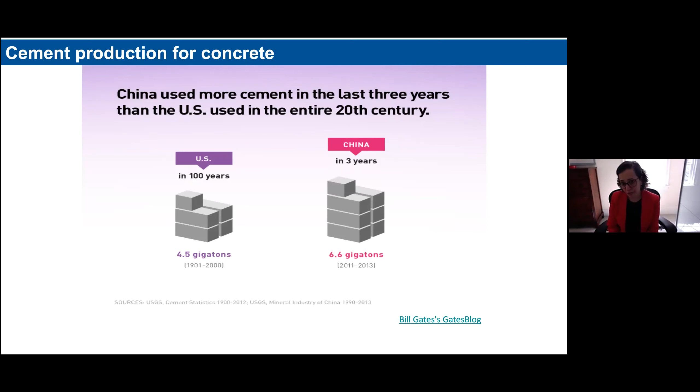And the reason why this happens is that to produce cement, to make these calcium silicates that are the powder that we mix with rocks and sand and water, you need to burn at very high temperature calcium carbonates and other minerals. This is a process that in principle is very convenient. It was invented in the beginning of the Industrial Revolution. It is very convenient because you can produce this calcium silicate everywhere on Earth using minerals that are available everywhere and in big quantities. But then you need to burn them at very high temperature in these huge kilns.

And this process, in which you extract the calcium from the calcium carbonates, leads to this huge release of CO2, huge due to the volume of the cement that we use. So the question is really, can we reduce, can we do the same thing? Can we meet the needs of the infrastructure, of the update of the current infrastructure, of the new infrastructure that we need to build?

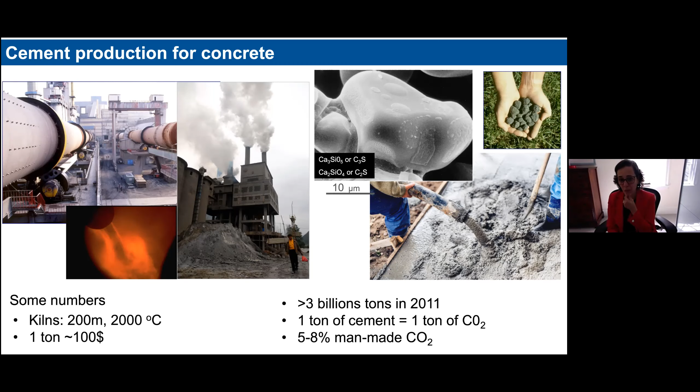Can we do this in a smarter way, reducing actually the amount of cement that we use, maybe changing the production of cement in a way that is more sustainable and greener? And so in order to understand how to do this, we need inevitably to understand how this material works.

And whereas there is more than a century of use of this material and more than a century of investigation of these materials, there are still gaps in understanding the fundamental physics that control its functioning. And this is where actually things can be done to devise more sustainable practices and more sustainable formulations.

So the reason why we actually produce this powder is that it's very reactive with water. When you mix it with water, the grains of the calcium silicates immediately start to dissolve. And from the dissolution of the grains, there is another material that actually forms and precipitates. And this is what is called calcium silicate hydrate, or CSH, which precipitates in the form of nanoparticles. And these nanoparticles now are very sticky.

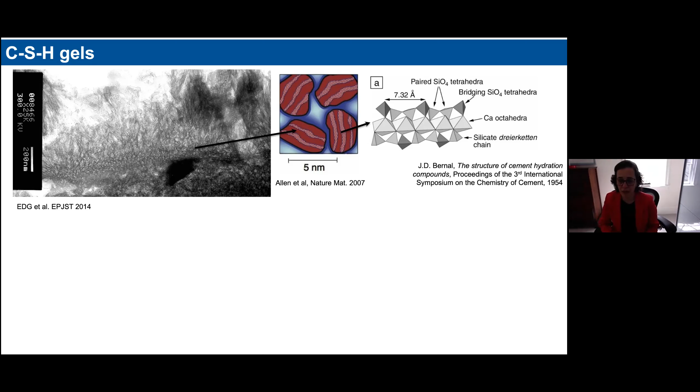They stick together into a gel-like structure that fills the space and literally glues together cement and all the different components of concrete into a solid that is basically as hard as a rock and that we can use for buildings, bridges, and all our infrastructure.

So the questions that are put forward at this point are, how can we reduce the CO2 footprint of this process and of this material without compromising the mechanical performances? Ideally, we would like to enhance the mechanical performances so that we can do more with less. And this could be one of the strategies that we need to pursue.

The other option is actually to try to change the chemical composition of this material and try to come up with a composition that doesn't require such a process that releases this big amount of CO2. So why is this not easy?

Well, at the very small scale, this material, as I said, precipitates as nanoparticles. These nanoparticles have a layered structure that, in fact, is very similar to the structure of a rare mineral called tobermorite, as was recognized already by Bernal several years ago. The nanoparticles then form amorphous structures, which then aggregate into this type of gel that has a fine and very wide pore distribution.

So this is the tricky part, because this is a solid that forms in very non-equilibrium conditions and whose mechanical properties at different length scales are very hard to predict. So it's very hard to understand how to change the chemistry in ways that modify the aggregation process, which then modifies the properties of the final product.

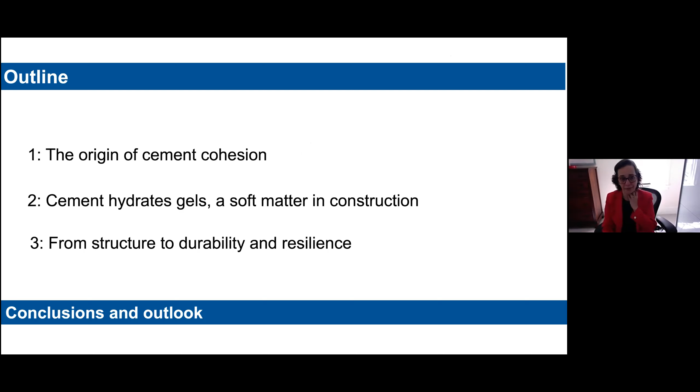Okay. Feel free to interrupt me at any time and ask questions.

So why is this material sticky to start with? Well, you have these nanoparticles that precipitate. And in fact, even at the very small scale, cement is a particularly complicated material. The nanoscale structure is really similar to a rare mineral called tobermorite, although with tobermorite you cannot actually make cement. And this has been studied. There is now a large literature on atomistic simulation of this material.

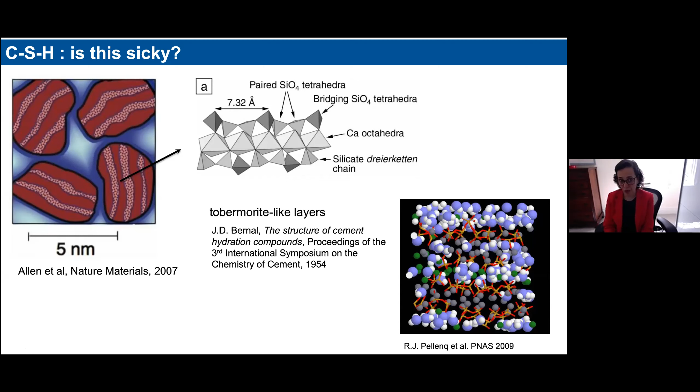But in the end, the cohesiveness of the material comes from the fact that the surfaces of the nanoparticles are very sticky with each other, and they are immersed in water and the ions that are continuously produced by the dissolution of the grains.

So, if we look at what happens between two nanoparticles, you have the surfaces of the nanoparticles that are negatively charged, and the surface charge evolves as cement hydration proceeds due to the underlying chemistry. So you have these negatively charged surfaces with counterions in between, which are mainly calcium ions, and so you have basically like-charge attraction.

But in fact, it's not uncommon in colloidal systems. Some of this, for example, can be understood, as we know, with the DLVO theory. But in this case, this picture really does not apply, because the surfaces have quite high negative surface charge. And the counterions in between are mainly calcium ions, which are divalent.

In fact, if you use the DLVO theory to compute the net interaction in this type of system, you basically get only repulsion. So what this means is that the cohesive interactions must come from whatever DLVO does not include. And so they must be the result of strong ion correlation forces that are present in the system due to the high surface charge and the fact that you have divalent or multivalent ions.

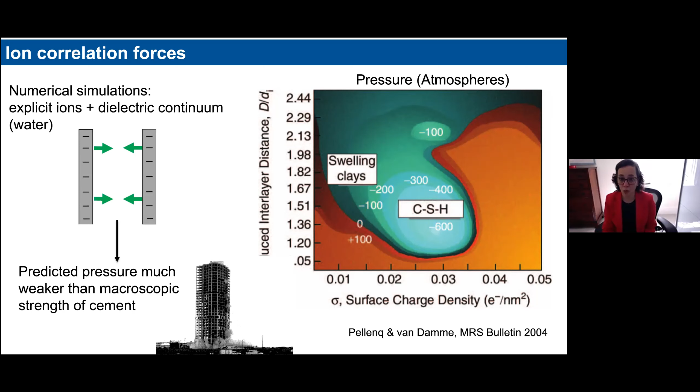So what we have done is to consider the two charged surfaces with the calcium ions confined between them, but with the fact that the medium in which they are immersed is not a bulk dielectric medium, but actually water. So we have performed simulations. This is mainly the work of my student, Abhay. I insist in saying my student, but he is now a postdoc at NIST.

So during his thesis, he devised this model in which we also consider explicit water. We used SPC/E water, and we did some tests also with TIP4P water to make sure that our results were not affected by the choice of the model.

And so when you do three-dimensional simulation of these charged surfaces with the ions in between and with explicit water, you realize that the situation is quite different, because in fact the ion and water structuring in confinement changes completely the net forces between the two surfaces.

Basically, what happens is that there are ion-water structures that become specifically stable at different degrees of confinement, and these ion-water structures do two things. They optimize the packing of the confined system in between the two charged surfaces. They dramatically decrease the dielectric screening of water in this very small space, because all the water that is there is bound in this ion-water structure. And this makes the cohesive interaction between the two surfaces grow by 2 orders of magnitude.

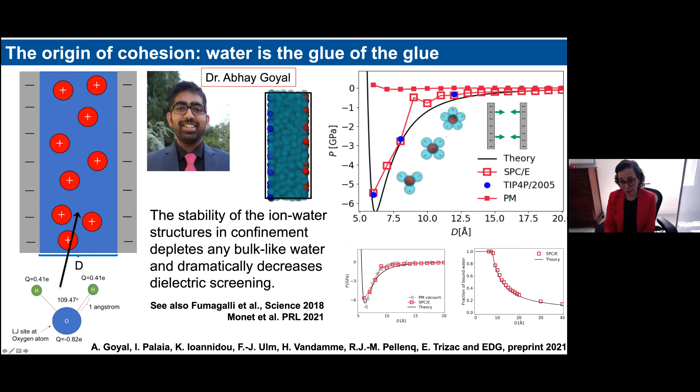We can also use the theory to predict the fraction of bound water that is present in the system at different degrees of confinement, and then compare it with the data in the simulation, and they actually agree quite well.

So how does it work? Well, basically what you see is that in presence of high surface charge, the ions are squeezed close to the surfaces, and they form these hemispherical hydration shells with the water, and the stability of this structure changes with the degree of confinement. As you increase the confinement, the stability of this structure becomes higher and higher.

And so as you decrease the space available, what you get rid of is water that is bulk-like because it's free. And all the water that remains is the water that is very persistently bound to the ions. And so as you increase the degree of confinement more, you select a different type of structure depending on how much water is available and which structure you can actually pack in the more and more confined space.

So this phenomenon actually has two consequences that are very important for cement, because they explain two very strong observations that have been made in experiments over the years. One is the fact that the forces between the surfaces, the cohesive forces of cement, are actually very ion specific, which makes, in fact, changing the chemistry and coming up with greener formulations very tricky and difficult to do. But this understanding can now open new ways to see how to do this.

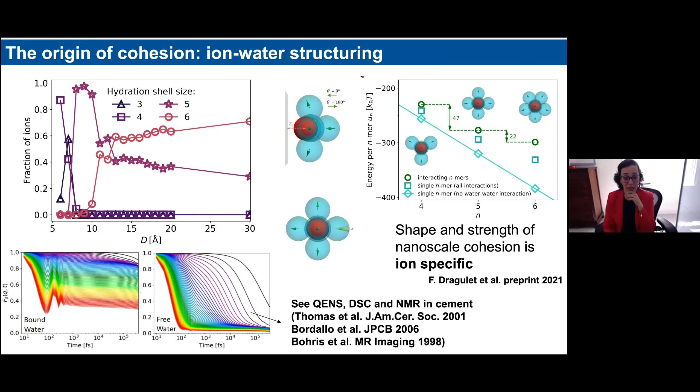This phenomenon, the structuring of the ions, the stability of different types of ion-water structures, and the water dynamics depends on the type of ion, depends on the degree of confinement, but it depends also on the surface charge, because depending on the surface charge, ions are more or less squeezed and more or less dense in the two layers that they form, closer or less close to the surface. So depending on the surface charge, there are different types of ion structures that you can pack. And this is important for cement hydration.

Why? Because during cement hydration, the surface charge of the nanoparticles actually increases over time. This is a very important characteristic of the development of the cohesion in this material. And so in our calculation, we can distinguish what happens at early times, where you have relatively lower surface charge. With relatively lower surface charge, the ions are less squeezed close to the surface, so you can still accommodate full hydration shells, very similar to those in the bulk, at relatively large separation of the two surfaces.

And then when you start to increase the confinement, you can stabilize the system and get cohesion by changing the hydration, the water-ion structure. But then you need to break these hydration shells, and this effect can produce intermediate range repulsions that are in fact seen in AFM measurements of surface forces between CSH nanoparticles during cement hydration.

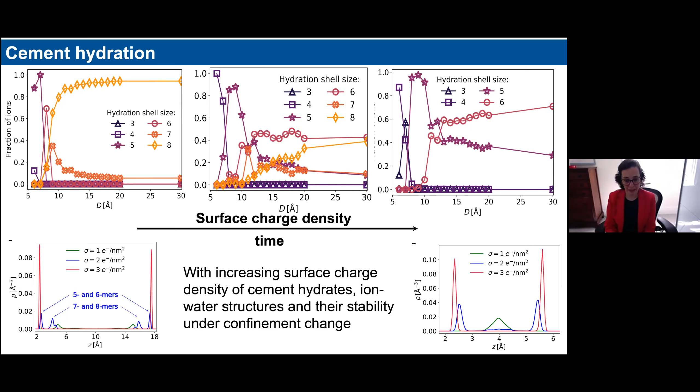And so you end up with a different pressure profile between the two surfaces over time. Interactions can combine short-range attraction and repulsion in the very beginning, and then the attractive part becomes more and more prominent due to the phenomenon I was telling you about. And these profiles and their change over time closely resemble the first measurements made nearly 20 years ago by the group in Dijon, where they had an AFM tip on which they grew CSH, and they used it to poke on CSH produced during hydration of a cement grain surface, in a very nice set of pioneering experiments.

So now that we have this connection and some understanding of how the chemistry and the physical chemistry of the system actually leads to this very strong cohesion and this coexistence of short-range attraction and repulsion, we have some new ingredients to ask the question, how does this enter?

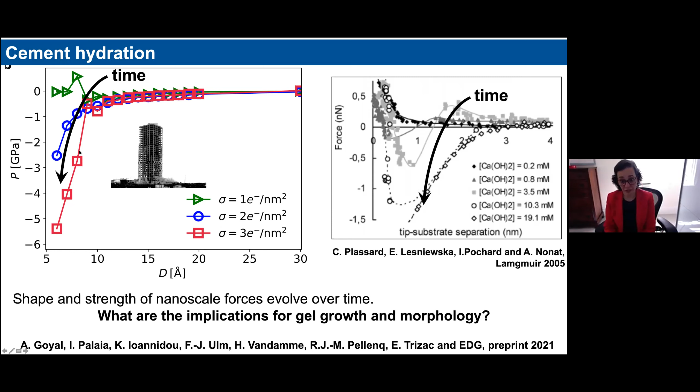Now, how does the knowledge of this, knowing these forces and understanding this evolution of the cohesion of the material, actually affect the formation of the CSH gels? And so what we have done is to design an approach in which we can now study the development of these CSH gels very much in a soft matter, coarse-grained type of approach,

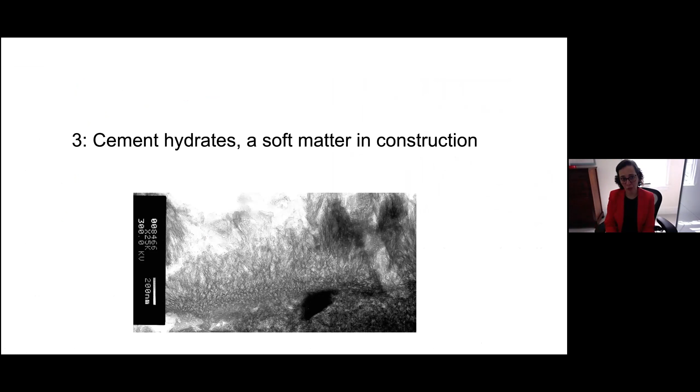in which basically we model the CSH nanoparticle precipitation with a grand canonical Monte Carlo type of process, where the chemical potential you can think about as basically the free energy gain for producing one of these nanoparticles. So for the production of one of these cement hydrate nanoparticles during cement hydration.

And we combine this grand canonical Monte Carlo scheme with molecular dynamics simulation, in which we can use the interactions that we know how to connect to the physical chemistry of the initial powder mix, to basically study how the precipitation of the nanoparticles interferes with the interaction of the nanoparticles in solution, and how this changes the way the gel forms.

So what we have done is to use this type of scheme considering a different type of interaction. These are a simplified version of the profile that I was showing you, in which basically what we studied is how the presence of this intermediate range repulsion, which can appear in the very early stages of hydration, and its evolution, as it goes away over time because interactions become more and more purely cohesive, affects the formation of the gel. Basically, this is the question that we have.

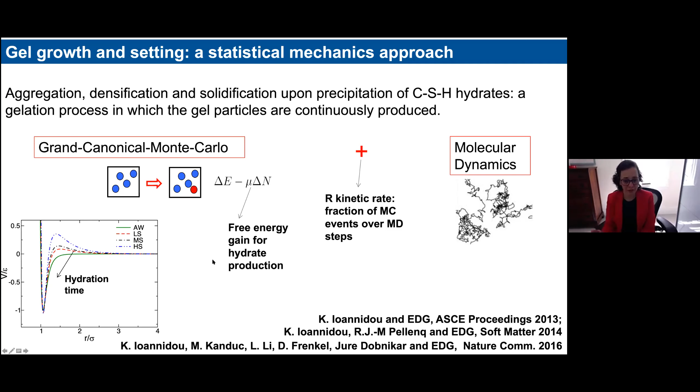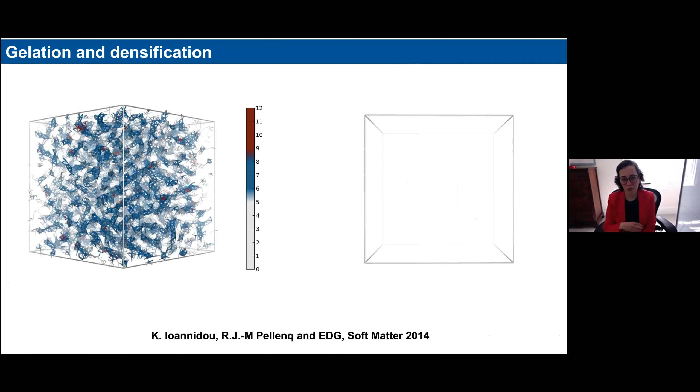So when you do this, what I'm showing you in this movie is the precipitation as it occurs during the simulation. What you're seeing is just the links between the nanoparticles, for clarity. The color represents the number of neighbors that each particle gets bonded to. And so you can see that from the beginning you have formation of these fibrils, which then branch and form into a network. And now the network has a more homogeneous pore size and then continuously densifies.

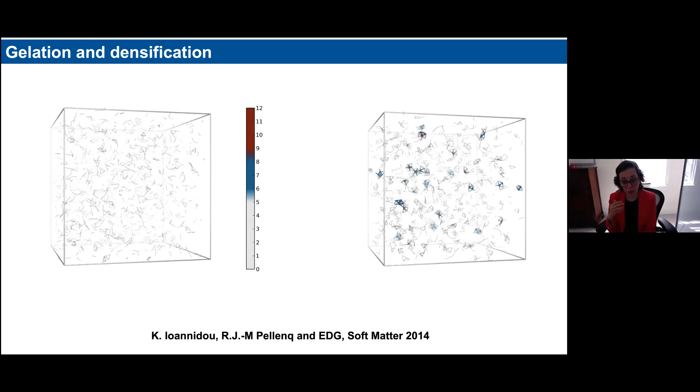So these correspond to the aggregation and gelation process with interactions that are very typical of very early stages of hydration, with this relatively high repulsive shoulder. And on the right, you see the movie of the same thing happening if the forces are instead typical of later stages, when surface charge goes higher and the interactions become more and more a very deep attractive well.

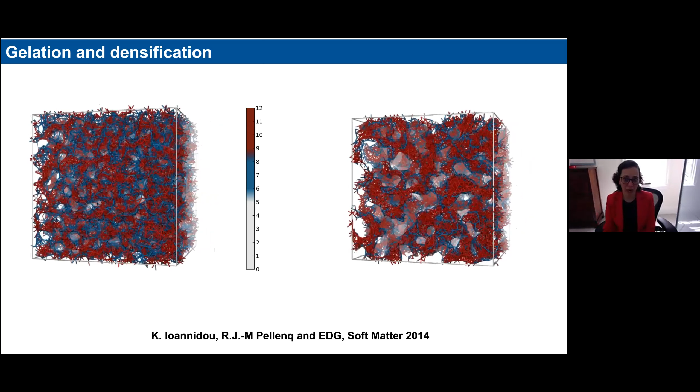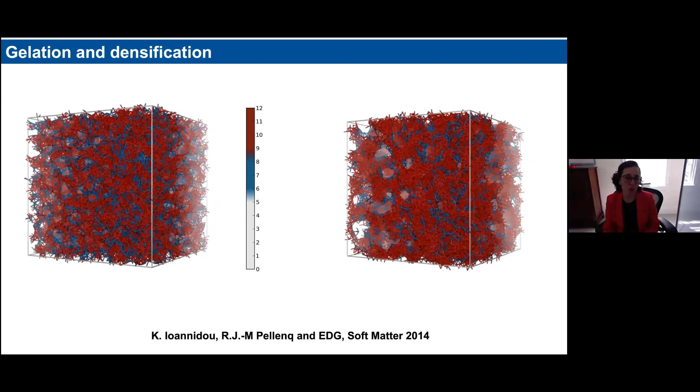And so you see that also in this case, you start to form aggregates, and then these aggregates branch into a gel, which has some porosity, and then this gel densifies more and more. And what we notice is that for the same precipitation rate, the aggregates that you get here on the right are much bulkier and locally denser. And the gel that you form is more heterogeneous and has larger pores.

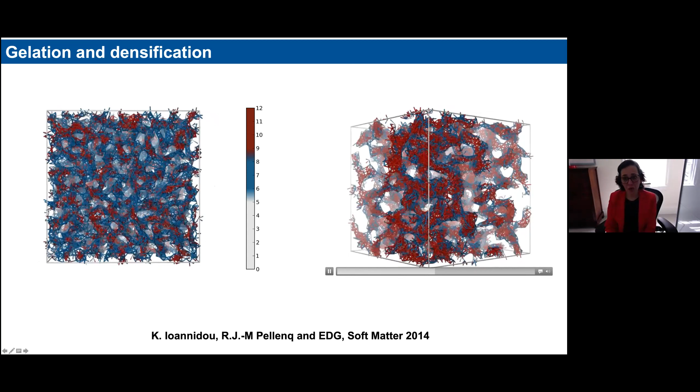So you start to understand a very interesting thing, I think, that the sequence of how the interactions evolve over time during the cement hydration has an impact on the development of the properties of the gel in a way that was not necessarily obvious in the beginning, because the fact that you start from a lower surface charge, where you can have this intermediate range repulsion, leads to a very fast growth of these fibrils, which are favored by this type of interactions.

And then the fibrils branch to form a gel. So the growth of the fibril now is very fast. And in fact, it's a process that we can map into the acceleration of the gel formation that I showed you in the beginning.

And then the gelation that occurs in presence of this interaction actually favors very early stage percolation and therefore mechanical properties. So I can start to have a somewhat solid material very early. It also allows me to set some preferred size of the pores, whose traces somehow remain in the following structure of the gel.

On the other hand, when these interactions become more and more attractive, what I get is a gel that tends to be much bulkier. In fact, this type of interactions characterize rather the end of the hydration process, and when they take over at later stages of cement hydration, they favor further densification of the material.

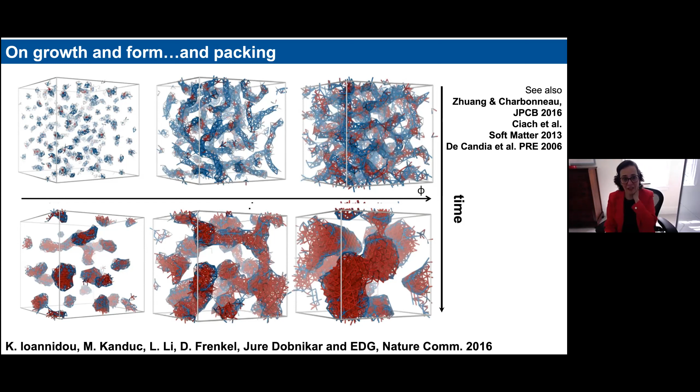And so we can think about the sequence in time of what happens during cement hydration to go in some sort of diagonal direction across those processes. And this is important. Why? Because I already told you that having these interactions in the beginning favors early stage percolation, development of mechanical strength, and setting the pore size. Later stages, characterized by more and more attractive interactions, favor local densification of this network even more than if your interactions had remained the same.

And this is very important, because the fact that the material reaches such high strength, mainly captured by the contact between two nanoparticles, is really due to the fact that the material is able to densify continuously, even at much later times, and even when the percolated solid structure is already set.

And so the fact that the microstructure of the material evolves in this way with these underlying processes allows us to understand what is observed in cement hydration. And it provides a new framework in which we can understand what properties we need to pursue if we want to change the chemistry of the system, but still keep this type of path in order to guarantee that the material has in the end the desired properties. And I will come back in a moment to that.

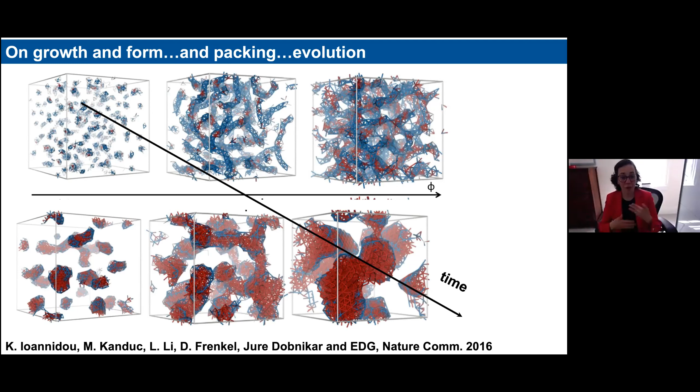The other thing is that now we can see that these early stages, when the material is really soft matter, and I would call it soft matter in construction because it's a soft solid material being built, are a very interesting regime in which we can intervene to make the material stronger and to adjust the pore sizes, which has consequences for increasing the mechanical properties of the material, to make more with less, and to increase the durability of the material through its interaction with the environment.

And so you can see that, by doing this, we also found that the early stage type of interaction that leads to these fibrils, this more anisotropic growth of the gel and earlier age percolation, favors a type of structure that is less sensitive to these spatial gradients, whereas the later stage interactions are much more sensitive to the spatial gradients, and so the heterogeneity of the gel that we had already seen in the other simulation becomes even more enhanced.

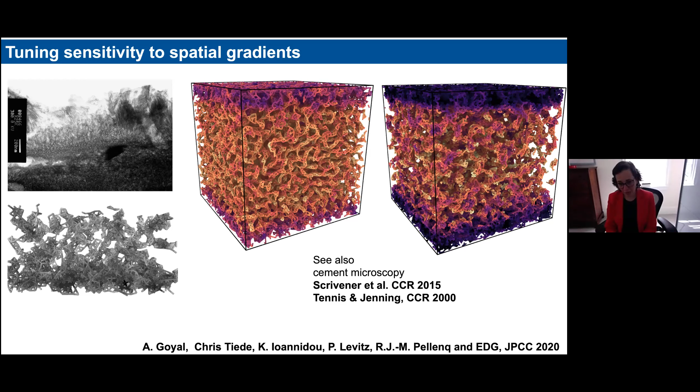Okay, so now the question is, what can we really do with this type of information? Once you understand this physics, can you really start to contribute to the discussion on how to improve, for example, durability and resilience of the things that we build with cement? Because in the end, these are very important aspects that we care about for the quality of life in the built infrastructure, and for the whole economy and ecology of the construction cycle.

The presence of these pores and the connectivity of these pores is very important for the interaction of the material with the environment, with different degrees of humidity and different types of environmental conditions that can evolve. So identifying this pore network is actually extremely important for understanding the durability and the resilience of the material in the infrastructure.

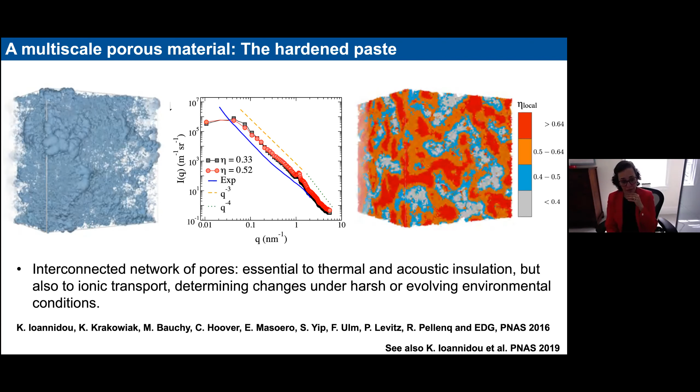And so what we can do is identify which part of our structure is in fact more relevant to the experiment. And you can see that, even in the lower density gels overall, there are inner parts of the material that have higher densities and that are still percolating. And so these are responsible for the main mechanical strength that is measured in the nano-indentation experiment, and for most of the hardness of the material.

So what we are also unraveling here is that there is a very dense rigid backbone of the material that is probably formed in the very early stages of the gelation process that we were discussing before, which then constitutes the part of the material that is harder and stronger, over which the successive processes deposit layers of less dense material that is then in contact with the pores.

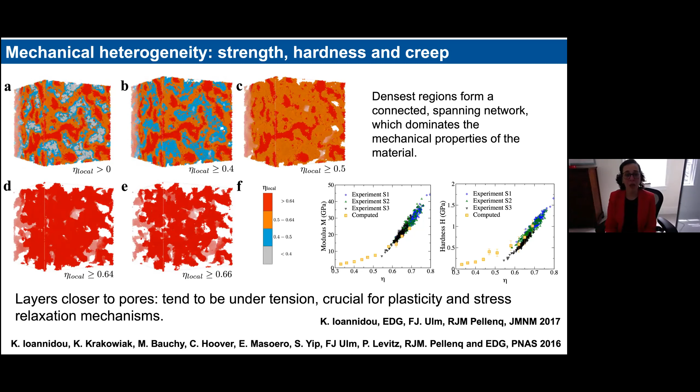And so you can now study how this specific sequence of internal stresses gets frozen in the material as the gelation process develops, and how, by changing the gelation process, I can actually change this type of stress heterogeneities, and therefore change some aspects of the linear and nonlinear mechanical behavior of the material, which can go all the way to creep and crack healing, and therefore increasing the material toughness.

Okay, so basically, if I wrap up all this together, what I told you is that actually understanding cement as a material in the context of construction is a unique opportunity to try to say something and to contribute to the question of the sustainability of the construction industry, and how we can actually change things in a scientifically guided way to make a difference in reducing CO2 emission of this very important industrial sector.

What I showed you is that, in fact, if we start to approach with a physics perspective the cohesion of the material, we can understand that water plays a very important role, and we can understand quantitatively, through water, the ion specificity of the nanoscale cohesive forces in cement, and how the evolution of the forces depends on the water confinement and on the ion water structuring.

And I would say that this is really a first step, maybe the zero level step, to try to now design cements that are greener and can still perform in a similar way. From this information, we can build a new approach at a more mesoscale level to rationalize what happens as the nanoparticles start to gel, and how the development of the microstructure of the gel determines the porosity and the mechanical strength of the material, and how this development allows us to identify new pathways to change material properties and design mechanical performances during cement hydration.

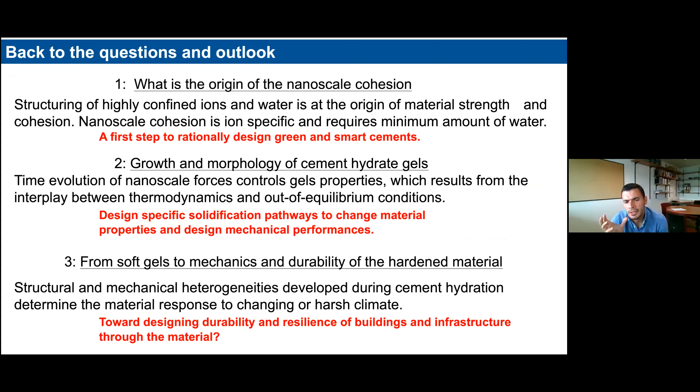I just have a second question. You have shown in the beginning that you need a certain degree of confinement in order to form these water structures that are necessary. Water ion structures, yes, to keep the cohesion. But in order to do that, you need to bring these surfaces together. Right. In the simulation, it's easy, you probably fix the position of the surfaces. Definitely, yes. So in reality, what is keeping these surfaces together while this structure is formed?

Basically you have to imagine that you have the grains, and the grains progressively dissolve, and this material is precipitating continuously. So the volume fraction of the nanoparticles is increasing over time. And so the thing that we mimic with the change of confinement is basically the densification process of the system. You have a larger amount of nanoparticles produced over time, and this makes the distance between nanoparticles shorter and shorter.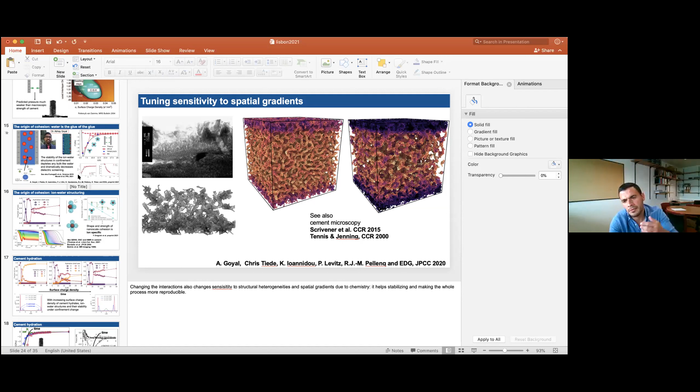But is the surface charge always the same, or is it also evolving? No, at the same time, the surface charge is. Okay. Otherwise, the energy cost of putting another particle there will increase. Yes, and there are many studies of this type of kinetics, but one that is typically shown is the heat flow that comes from the reaction of the formation of CSH, which is exothermic. From this type of curve, you can turn this into a degree of hydration, counting the amount of hydrates that you produce.

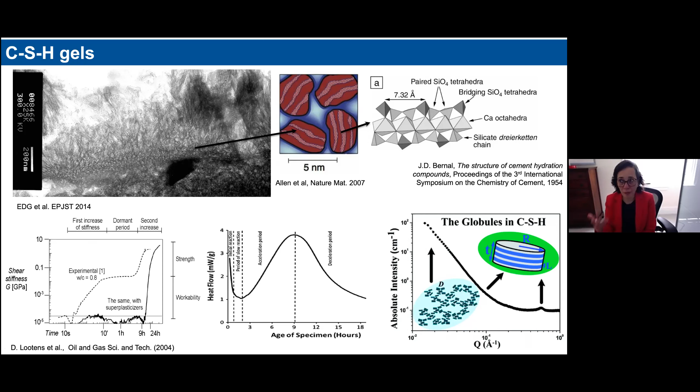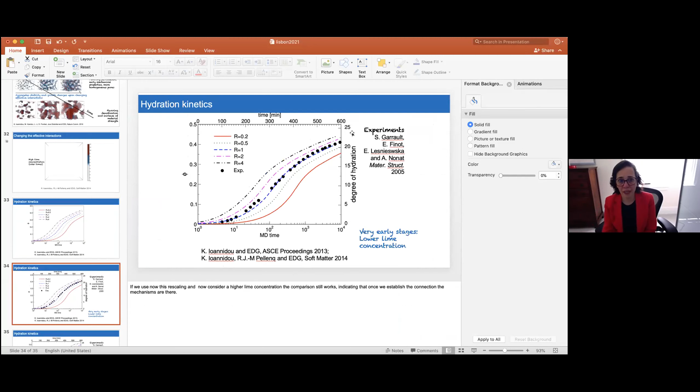Maybe I even have data, let me see. Yeah, so basically this is what you have here. From the calorimetric measurements, you extract this degree of hydration, which is the amount of nanoparticles of calcium silicate hydrate that you produce. And this over time increases in a sigmoidal fashion.

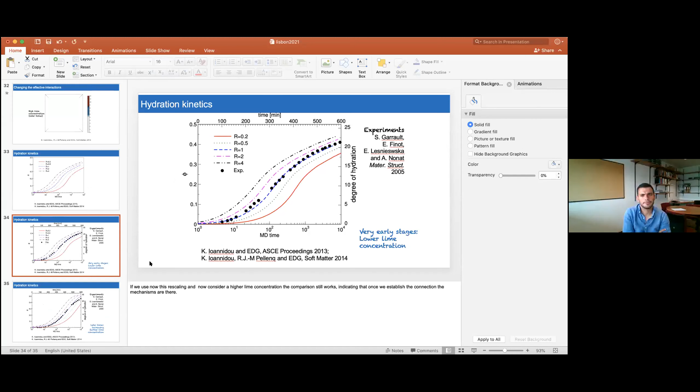And here I've compared this with the increase of the volume fraction in our simulation, and you can see that you get a similar shape to what you see in the experiment. So there is some aspect of this kinetics that we are able to recover. Okay, thank you very much.

Right, thank you. Now we have a question from Margarita. Oh, hello, Emanuela. Let me put my video on. Okay. I have a couple of questions. Oops, my video is sort of not okay.

Nice to see you, nice talk, but there is something I didn't quite understand. When you have your effective potentials that change with time, from repulsive to fully attractive, how do you choose those times? To me, it seems like a continuous process. Yes, you're right. Separation of time scales. So how do you do it? In fact, I have to confess that we don't do it.

What we did is this first study where we fix one type of interaction and then we watch the relaxation with that type of interaction fixed, so we don't change it. We did that because we wanted to understand, if I have just one type of interaction, which type of gel would I get changing the gelation rate. Once you understand that the time evolution must be important, you would like to go back and do exactly what you said, to be able to mimic a process in which this evolves over time.

And we have done it qualitatively, just to make nice movies for us, but it's very tricky to understand how to, because in the simulation, of course, you can do it in many different ways, and how do you choose things in a way that makes sense. So one strategy we have identified is, now that we know how the type of interactions are evolving depending on the ionic composition, we can go back to data from the experiments that have monitored the evolution of the ionic composition, and then understand what could be a reasonable, realistic way for which this can evolve.